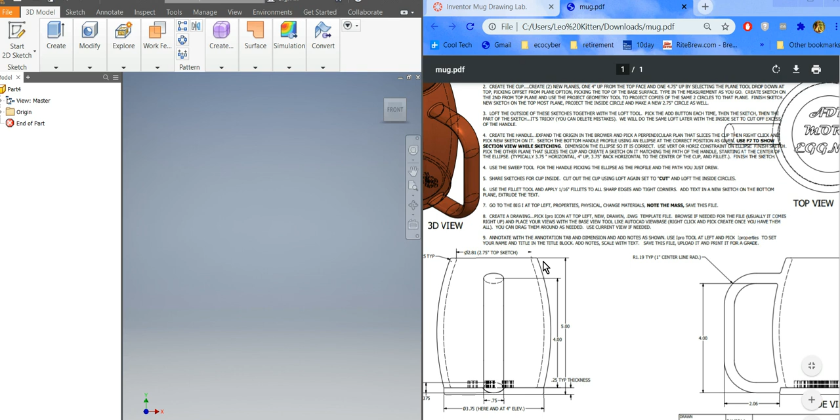Okay, today we're going to make this mug. You can find one on the internet that's similar, or you can just do this one. It's your decision. I'm going to have a split screen going on so we can do both.

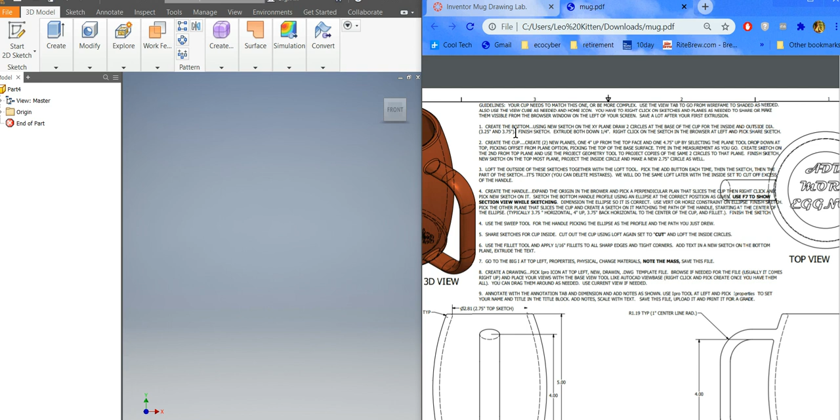The first thing it says here is create the bottom using a new sketch on the XY plane. Draw two circles that form the base, 3 1/4 and 3.75. If you think your mug is about that size, just go with it. This makes the inside and the outside of the mug. Pick yours to be that size, and then we're going to extrude them down 1/4 inch, and then share the sketch.

Right off the bat, we pick Start 2D Sketch, Start 2D Sketch, and then hover over the plane until you see which one you got, and we want the XY plane. Pick it with your left mouse button.

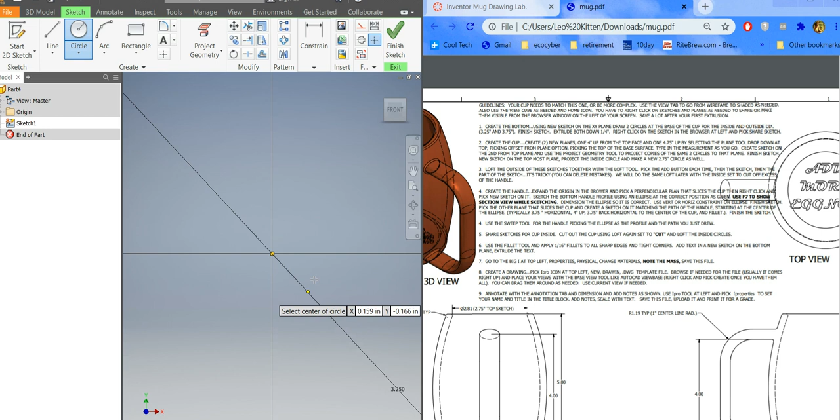Then we're going to pick on Circle, and hover over the origin until we see a green dot. When you see the green dot, then you have your origin selected and it snaps to it. Draw your first circle, 3.25 - just type it in and hit enter. Pick your origin again, move your mouse out so you can see what you're doing, and the next circle was 3.75. Hit enter. Okay, and once that's done, you want to finish sketch.

Let's make sure everybody got that far.

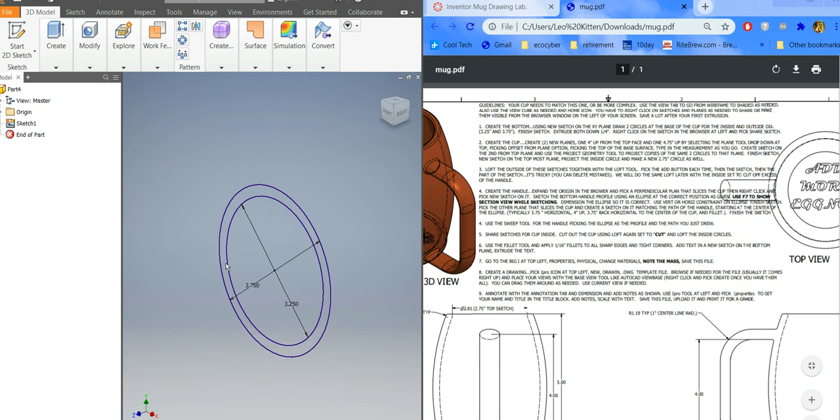Okay, so now we want to make the bottom of it right down here. We're going to extrude these down. Since there's two surfaces here to pick from, you'll have to pick the inside and the outside most likely. They'll both be shaded when you're ready to do it. So go over here and pick extrude, or right click and pick extrude, either way is fine.

And now it's looking for a profile - that's why it's blue. So pick the inside of the center circle, and then pick the outside area between the two circles. That way you got them both.

Now they're going the wrong way. We want them to go down, I think. Extrude both down. To switch directions, you hit this little arrow on there. Everybody see that direction 2? We want to send it down, so we got to switch it to direction 2, so it goes down.

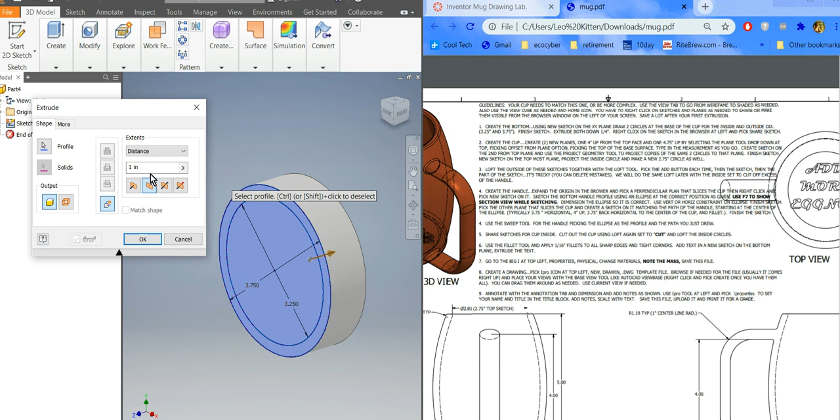We also want to change the thickness from 1 inch over to 0.25. If you want yours to be thinner than that, like if you've got a tin can one, if you want it to be 1/8 of an inch, just make it 0.125. If you want to make it thinner, go ahead. But because this will be the bottom, or if you want it to be real heavy down there, that's fine too. So 0.25 or whatever thickness you want for the bottom. Then just hit OK.

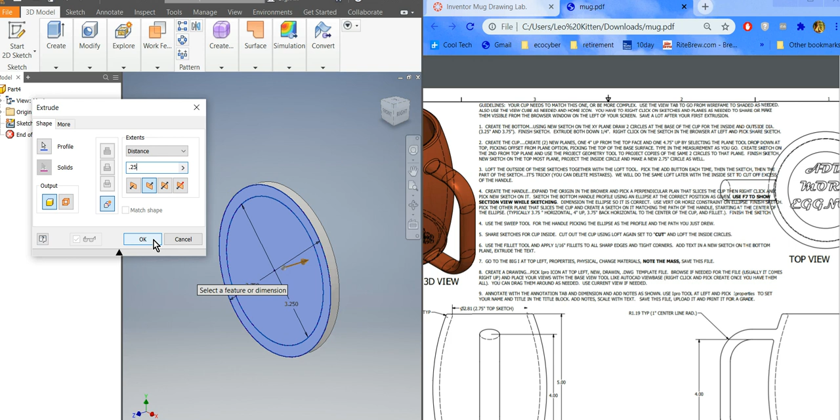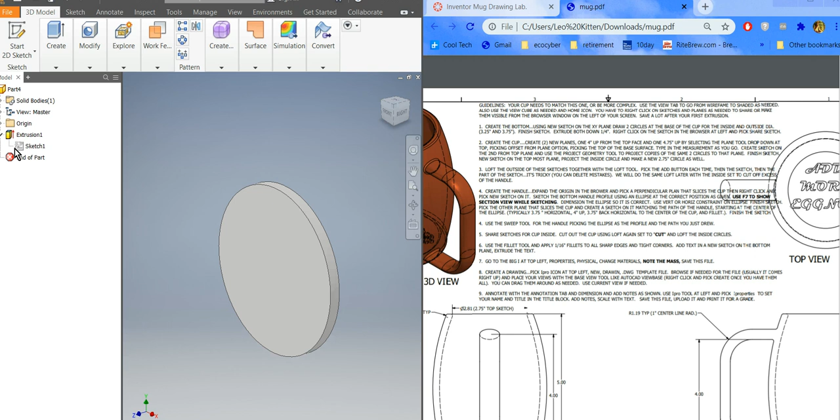Okay, so now we need to extrude this up. Whenever you make an extrusion, it consumes those sketches, so we have to share them so they're not consumed up. Over there in your browser, on the left, hit the little arrow to expand Extrusion 1. Now you can see Sketch 1 again. You want to right click on that and pick Share Sketch, and that'll let you use it multiple times - which some softwares don't make you do, but Inventor does.

Okay, so now we can use this mate, and it also makes it visible. So if share sketch isn't available, you can actually make it visible and get the same benefit out of it.

Alright, so now we need to make a couple planes, I think. We're going to create the cup, so we're going to create 2 new planes - one 4 inches up and one 4.75 up. I did that so I could get a nice blend from here all the way up to the top. If you've got a pretty straight mug, you'll just want to make maybe one plane, however tall you want your mug, maybe 4 inches up. If you've got a pretty big churn, you might want to change that plane to a little lower, like 1/3 of the way up, and then all the way up. So mine, I went from here all the way to 4 inches and 4.75.

After we do that, we're going to draw circles on that. Let me remember what my circles are. Create a sketch on the second plane from the top, and project geometry from the base. Okay, so those will both be the same. These are a little bit on the inside, and that makes it go in more. So this one's 2.75 at the top.

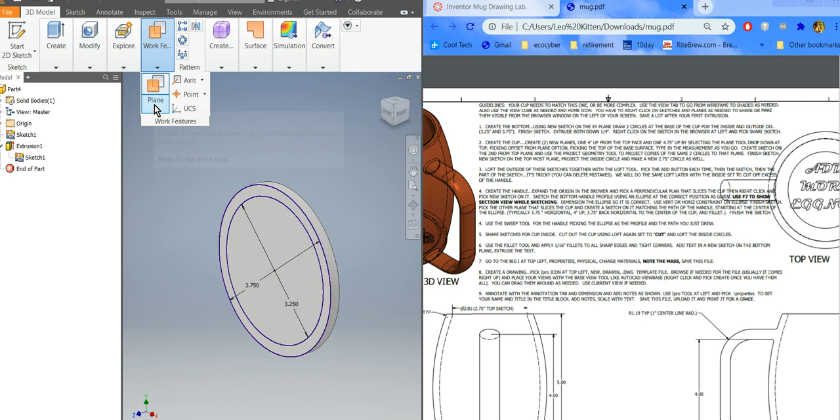Hit the arrow down and pick offset from plane. Now just pick the top of that cylinder we just created. It asks how far up you want to make the plane. We said 4 and 4.75, so pick 4 on the first one and hit the check mark.

You can hit enter to repeat the command in Inventor, just like AutoCAD. So hit enter, and it brings it back up and says select the plane. I do the same thing again, pick that one, and type 4.75. Now we've got both those planes to draw on.

Now it gets a little cumbersome once you get something very complicated, but this one isn't too bad so far.

Now we basically need to, on this one, just project these same two circles up. If you want yours to cave in or cave out, don't just project them — draw two new ones instead. But I'm going to project them.

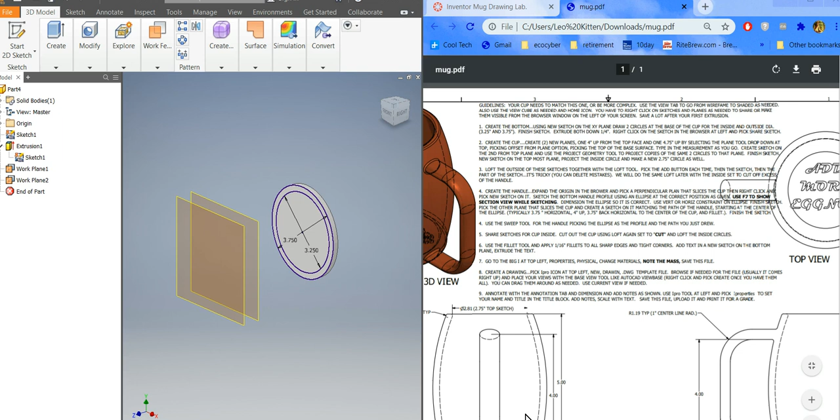So watch me. What we want to do is hover over that bottom plane we created, right click on it, and pick new sketch. Now when I hover over it, I'm hovering over the edge — that's how I select it. Right click on it, new sketch, and it should bring it on up. Now you're drawing flat onto that plane.

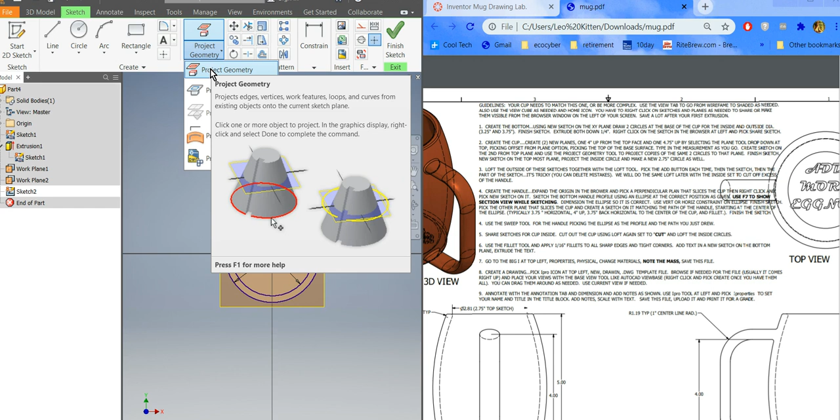Now, instead of redrawing those circles, you always want to use whatever you can from the previous sketch. I'm going to project those circles up with the project geometry button. If you want them to be a different size, so your cup caves in or caves out, just draw new ones at whatever size you want. Either way works. So I'm going to project the first two.

Just like that. Once you draw your new ones, throw a dimension on them, or project them like I did, and finish the sketch.

Same thing on this last plane. Basically, right click over the edge of it, new sketch, and draw — project the inside circle, and then make a smaller one, so that helps it cave in. So I'm going to project geometry, project this inside circle, and then draw a new circle.

Make sure I hover over to get a green dot so it's fully selected, and then I'm going to type in 2.75, enter. Now notice what we're doing when we're making these sketches.

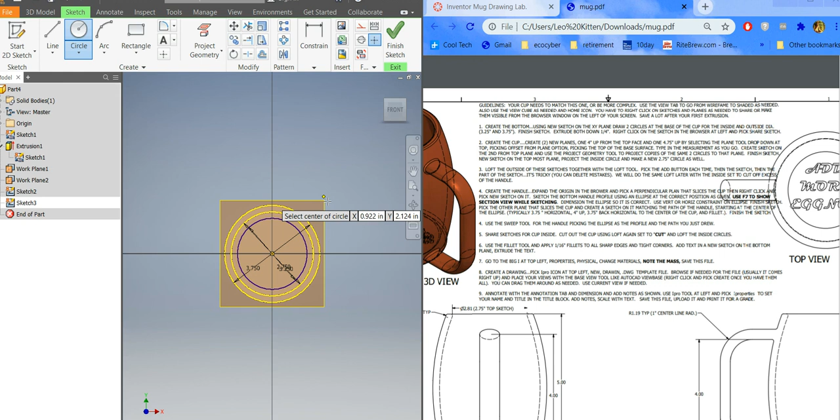Everything's turning purple, and in the bottom right corner of your screen it says fully defined. That's one thing we always want to see — fully defined. If it's not fully defined, then you didn't put enough dimensions or information in to fully constrain this thing. So I'm going to finish that sketch.

Now we're ready to loft the outside of these sketches together with the loft tool. We want to pick the add button each time, then the sketch, and then the part of the sketch that is going to be lofted up. So it gets pretty tricky — we're trying to do the outside and basically the whole thing.

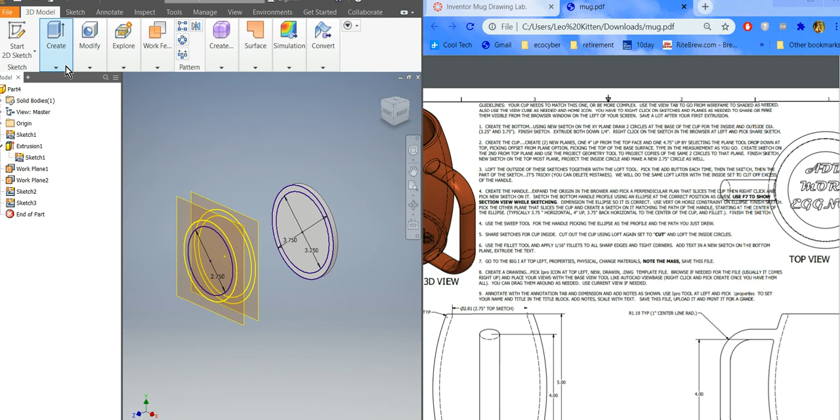We will do the same loft later, but we'll pick the inside part of it. So I'm going to do it real slowly, so if you want to watch me do it — it's a little tricky. So I go over here and I pick loft, alright?

You click here to add, and you basically pick the first sketch like that, trying to get the whole thing. I kind of got lucky there - so there it is, grabbing the whole thing.

So I picked that sketch, and it says on the note, selected sketch has multiple loops, please select the desired loop. I want the whole thing, so I'm going to pick that. If I would have picked the inside of it, I only would have gotten the inside of the loop.

Then I click to add, grab this one, and select on the circle itself. It says the same thing, it has multiple loops, so I don't want just the inside - make sure you don't just pick the inside. We want the outside, so I'm picking the outside one like that.

Then I click to add, and pick the top one. Again it says it has multiple possibilities. You could draw all these as separate sketches, but it's a little easier, less work, to do them at the same time. That's why I did them.

Now I'm picking on the outside again. You can see it starting to form - it should bend around this when you do all three at once. If you don't want it to bend around, you just go straight up from one to the other, hit OK, then share that sketch and do it again, and it would go straight. But I want it to bend, so that's why I picked that.

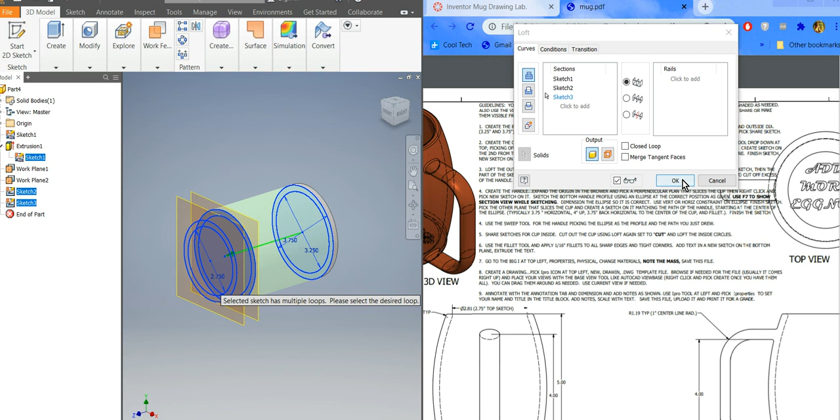When you get all three of them selected like that - I think I have them all selected, it's still asking me for multiple loops. I think I got them. I'm going to hit OK and see what happens here. Yeah, I got them. All right.

So we have to draw this ellipse for it to follow the path of the handle first. Since this thing's round, you just need a perpendicular plane - any one of them will work.

So what we do is go over to the origin in the browser and hit the little arrow to expand it. Expand it out, and now we want to find a plane that splits it, and we'll use the opposite one for the path. So you could pick the YZ, for instance, or you could pick the XZ. Let's do the YZ since that's at the top. Just right-click over that and pick New Sketch - hover over it, right-click, and pick New Sketch.

Now you're drawing on it. On mine, I do it right here at the bottom, and that's about as good a spot. If your handle's a little farther up and you want to put it an inch up, that's fine too - just draw it about an inch up and throw a dimension on it to the origin. Say it was there - I'll draw mine a little bit up just so you can see how that works, instead of right at the origin like that one is.

To draw a circle, you basically just pick circle. To draw an ellipse, you expand the circle down and then pick ellipse. I'm going to draw mine an inch up just so you can see how it works - actually, I'll draw it a quarter inch up. If you want yours farther up, do it farther up. If you want yours down here at the origin, draw it up on the green dot.

So I try to pick - you can see it wants to snap to the x-axis here, or the z-axis in this case, so I'm going to go ahead and let it do that. I'm going to try to hold it vertical, up and down and not crooked. It wouldn't really matter except you'd have a weird looking handle. So I'm going to pick a spot for that.

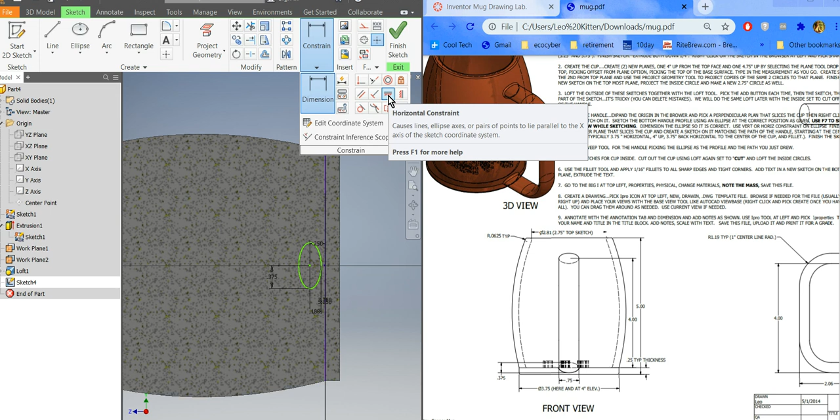The way to do that is you use these constraints, and one of them is horizontal and one is vertical. Just because it looks like it's horizontal, it might be vertical depending on where your axes are. I'm going to try vertical and see if it works. And it's not—I can see already it's got a yellow line going up and down, so that is not vertical. I need to do the horizontal.

Okay, so I'm doing the horizontal. Now you can see it's going the right direction, the yellow is. So I'm going to pick that center of it and my origin, and now it turned purple, so it's good.

Alright, so we've got that done. Finish that sketch—that's the first part of doing the sweep. Now we've got to do a plane on the other one. We picked the YZ last time, so this time we want to right click over XZ, okay?

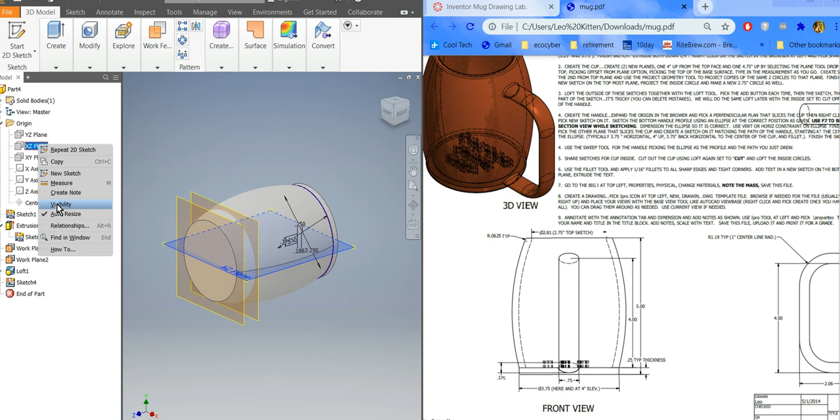And we want to do new sketch. Alright, and let's go ahead and hit F7 right off the bat so we know we can see what we're doing. Now you can see that, you can kind of see where that sketch is before, right in there, right? You can barely see—if you look real close, there's a blue or purple, whatever you want to call it.

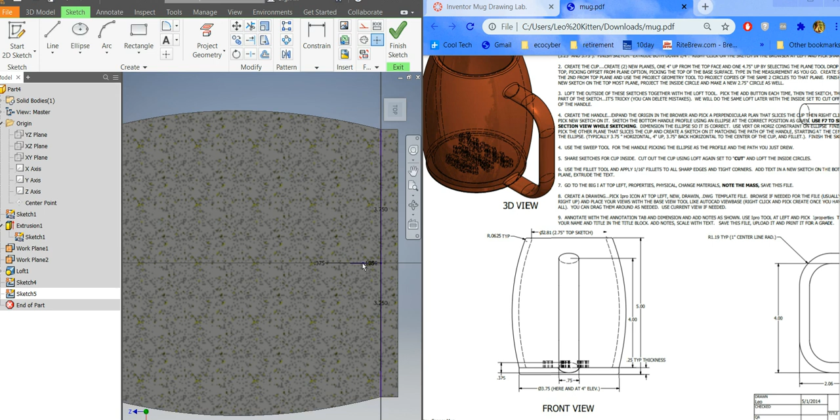We need to have a path that crosses that, okay? So it has to start right there, and then it has to go to wherever you want it to be. Now mine goes, it looks like, roughly 2 1/16, and the mug is 4. So it probably says in the notes how big to make it, and then it's 4 inches tall. But you can kind of freehand yours a little bit and throw some dimensions on it if you're doing a custom one.

So it looks like I've got 3.75 horizontal, 4 up, and then 3.75 back on mine. So I'm just going to do that. Okay, okay.

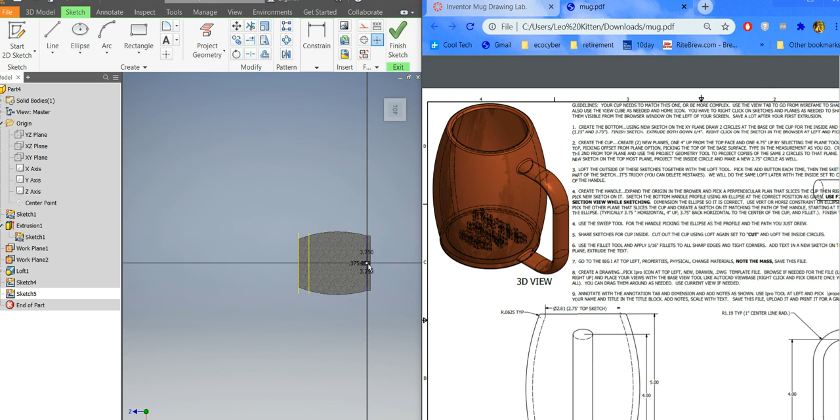So this, if you look real closely, that little blue that's showing up there, that is the side profile of the ellipse. So of course, if you look at an ellipse when it's sideways and flat, it just looks like a line—that's why it looks like a line. But that is the ellipse, just we're on the opposite plane now.

So I want to basically draw a rectangle, 3.75, 4, and 3.75 back, and then I'm going to add probably a 1-inch fillet on it. What did I say on that? Add a fillet, 1-inch center line radius—okay, so yeah, 1-inch fillet on it. But let's draw lines first. So just pick line, nothing fancy, and then we're going to draw from the middle of whatever object you made, a circle or ellipse or whatever.

I got it right there, looks like. Okay, I'm going to make sure I go straight up, hold it straight. You don't want it going crooked. So I'm going straight like that, and I'm going to type in 3.75 on mine. Right, and you can go how far you want.

If your cup's 4-inch diameter, you want it sticking out 2 inches, make it 4. If you want it sticking out 1 inch, make it 3. Okay, so mine's about 4 inches diameter, so I'm going to have to stick up 1.75 inches.

Then I'm going to go basically to the left, make sure I'm going straight to the left. I don't want it to all be crooked like that. And then I'm going to go 4 on that, up. It doesn't have to be that big. It's your cup, so make it whatever you want it to be.

Now whenever you went up, you probably want to go the same amount back down. So I'm going to make sure it's going straight back down, and I'm going to type in 3.75 again. Okay, and it's back down.

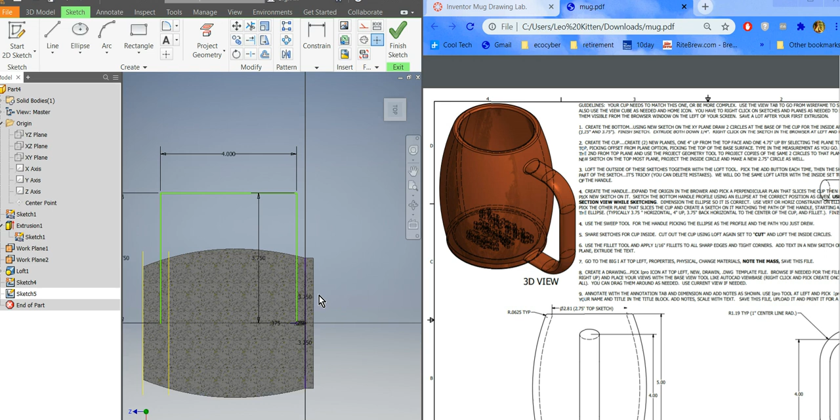Now you can see it's not locked down at all. There's a lot of things missing, it says it's missing 2 dimensions. A nice way to check is to grab a line, see how it's moving around, and hit undo. So it's definitely missing where it started from - even though I picked that point, it did not get it. So I'm going to dimension from that point over to here and see what that does, which should be the same, 0.25 in my case.

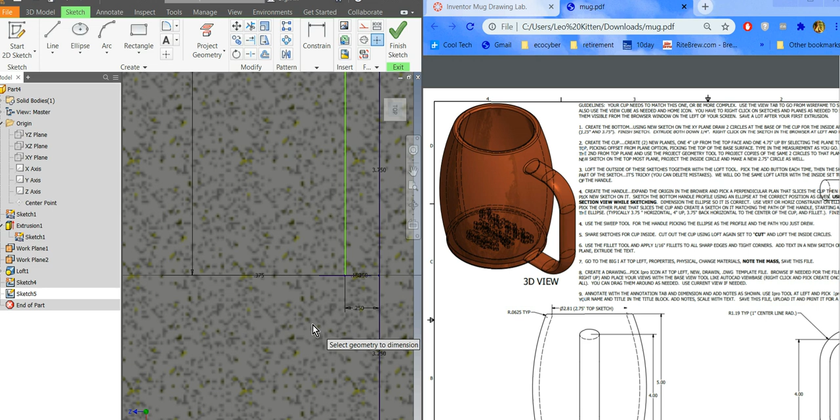Okay, that got that done. And then it probably doesn't know how tall it is too. So once again, I'm going to do the vertical constraint, even though it's horizontal, and pick it right there on the edge of it and to the origin. And that fully locked it down.

So it didn't know where my starting point was, that was its problem. Now after I get that done, I'm going to put a fillet on these 2 and get my radius done.

All right, so fillet is right here, it's all shrunk down. So I think that's fillet - yep, there's fillet. And it defaults to 1/8 of an inch. I'm going to just type in 1 and hit enter. And I'm going to pick the 2 lines I want to fillet together.

It fell off of it. Let's try again here - there we go. And pick the other 2. There we go, and that's all you need for your path.

When you get something like that done, you could do all kinds of crazy things with it. You could put a chamfer on it, you could draw a line at an angle. Whatever you want for your handle to be, the path for that ellipse or circle or rectangle, whatever to follow, that's the path you draw. As long as it's on a perpendicular plane, it'll work.

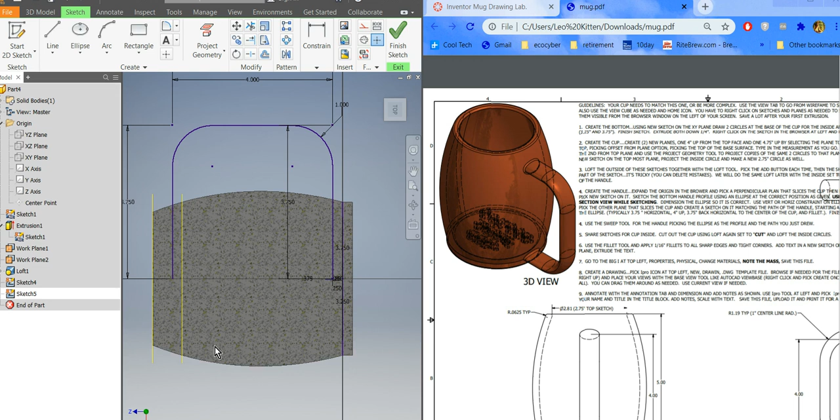All right, when you get that done, hit finish sketch.

Okay, so now we're ready to sweep the profile. So we sweep the profile along this path, and even though you can't see some of it, the best way to see this is you need to change the view, because you can't even see all the stuff on the inside. So you want to go over to view, okay?

And then we want to go to the visual style dropdown and drop that down, and we want to just pick plain old wireframe. If you pick with hidden edges, it won't let you pick it for some reason. So pick just plain old wireframe, and now you can see everything on the inside, okay?

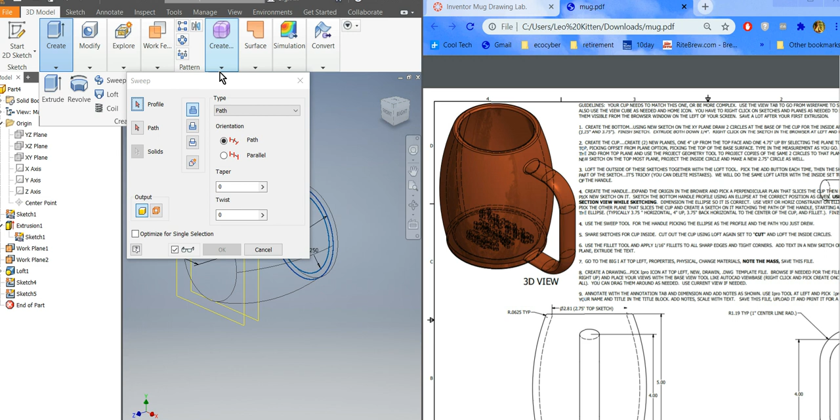And now we can basically, when we go into our sweep, pick our 2 sketches that sweep works off of. Now go back to the 3D model tab and pick sweep. Okay, now it's looking for a path and then a profile - sorry, I said that backwards, it's looking for the profile and then the path.

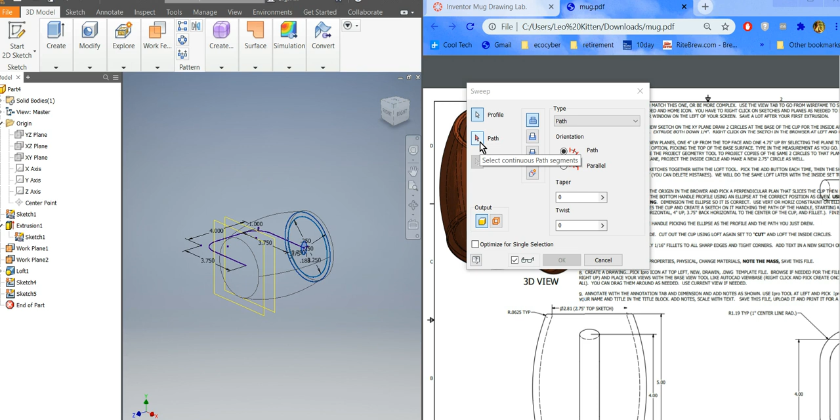So the profile, of course, is that ellipse or circle or whatever you wanted your cross section of your handle to be. So pick that - I don't know when you'd use more than 1 sketch for a profile, but it doesn't automatically move to path. So pick path, and then you got to pick. As long as this is a continuous line and everything's connected, it'll go all the way through, and you can kind of see it happen there. Okay, so I picked that one.

Of course, all these things let you cut it and so forth. You can taper it and do some pretty wild stuff. We're not going to do any of that, so just pick OK.

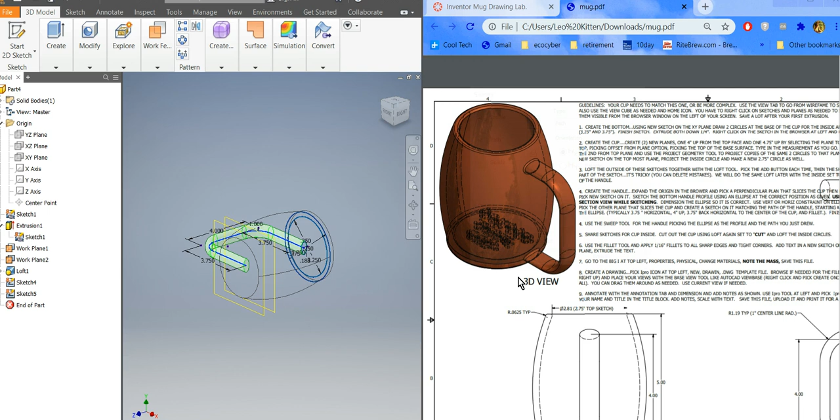Now at this point, I think we need to hollow this out. There's a couple ways to do it. We could loft the two circles down, or we could just shell it out. Either way would probably work since it's a pretty simple design. But if you shell it out, remember it's going to also try to shell out the handle.

I wanted mine a quarter inch thick, so nice and thick. Mine would probably fail because this thing's only 3/8 thick, so it can't actually put a quarter inch wall all the way around it. That's why I lofted down, but we'll go ahead and try it.

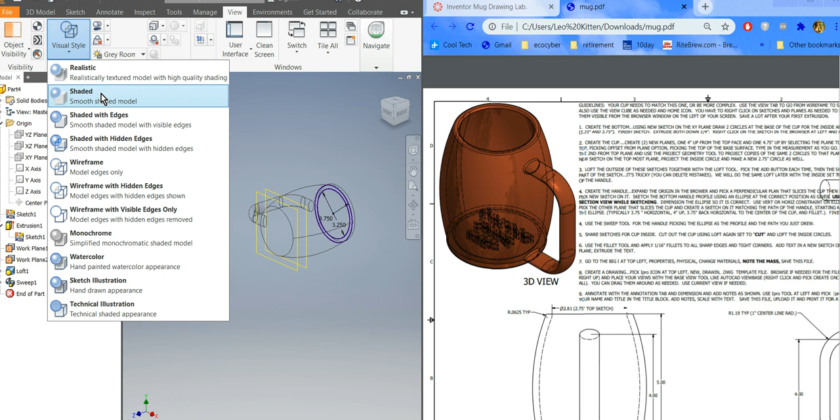So let's go to see if we can shell it. Let's go over to View again, Visual Style, and pick Shaded with Edges. And then let's go back to the 3D model. Now if you want any lip or anything else fancy on top of your mug, now would be the time to do it before we shell it.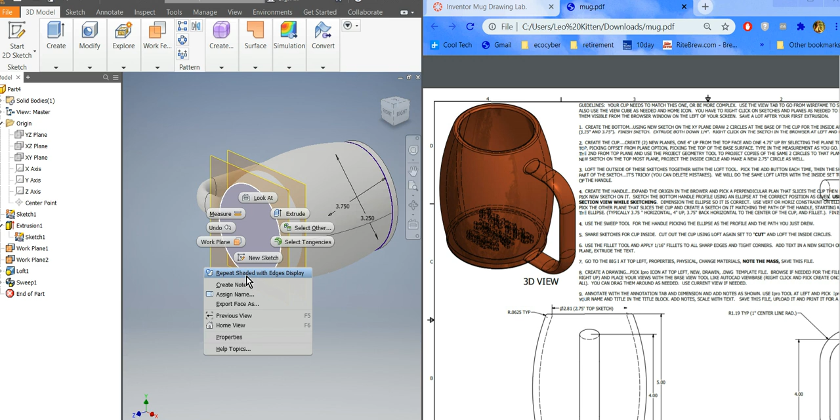You'd want to pick on there, right click, New Sketch, and draw your lip, maybe extrude it down 1/8 of an inch if you have some fancy lip on it. I don't have any of that, so I'm not going to do that.

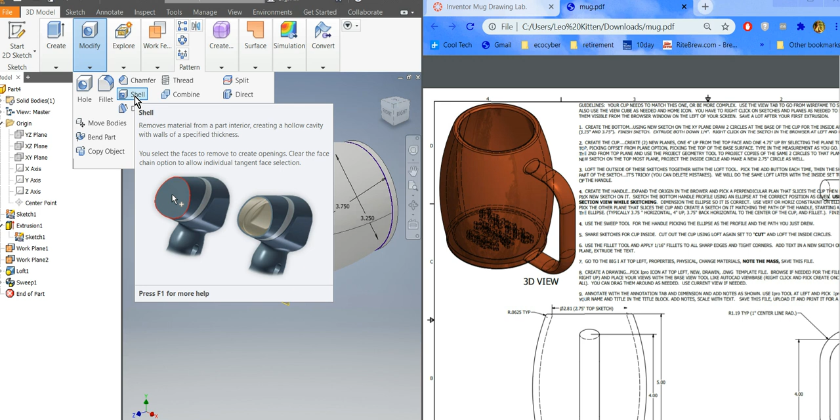So I'm going to go to Shell, which is buried over here somewhere under Modify. There it is, Shell. The way Shell works is you pick Shell, and then it's looking for a face you want to be gone. You don't have to pick a face, but very rarely do you make something completely hollow, so you usually remove a face or two.

So I'm going to pick Shell and change the thickness from 0.1 because I want mine thick—0.25. Then I'm going to hover over the face here, and it's failing already. I'm sure it's because of that handle, since they can't figure out how to put a quarter inch shell in a handle that's not even big enough for that.

Now, since the handle is 3/8, I'll bet I can get away with 0.18. Nope, it's not even letting me do that. So I can't get shell to work on mine unless I go thinner than what I like. If I go 0.125, it probably works.

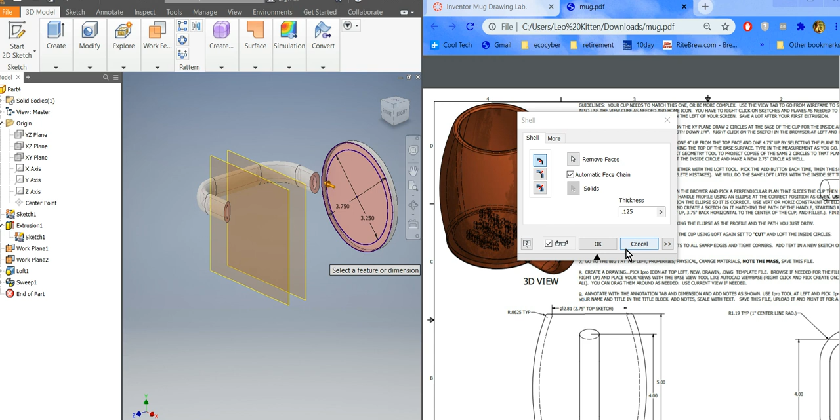I probably should save before you shell, because a lot of times it'll break the system. So if you didn't get it to work like I did, this is a good time to save. Let's go ahead and save our work. Mine was ultimately a failure there. Just make sure you put it on your U drive under CAD 60. I'm going to save this on my laptop real quick here.

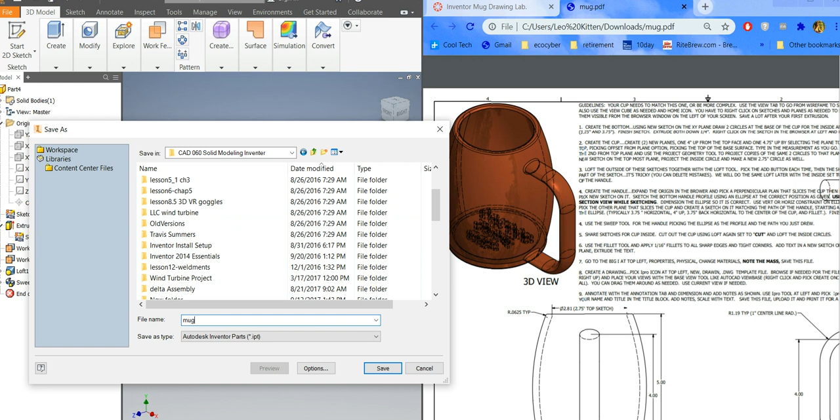Okay, so originally what we said was we were going to basically loft the inside of it out. So now we're going to have to loft the inside of it out, basically remove it.

I created a sketch up here on top, and then I had two circles here and two circles there, and I did that on purpose because they're all a quarter inch smaller diameter to get rid of them. If you forgot to put one on top, it isn't any big deal—you just right click on top of that face, New Sketch, and draw your circle however small you want it.

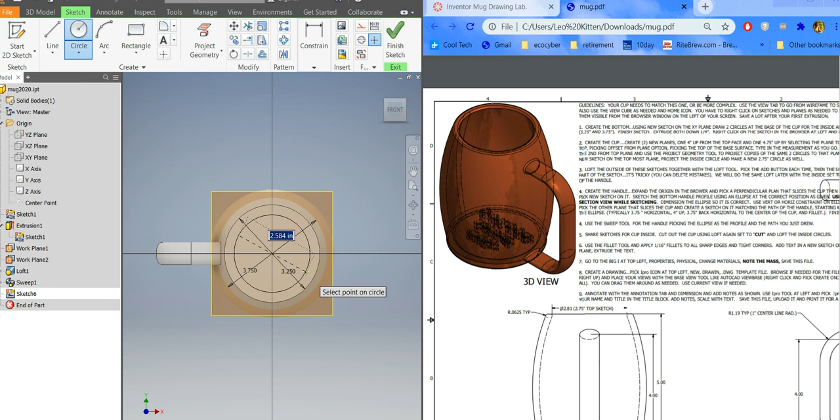Even though I did it already, I'll just do it again for fun here. I'm going to draw a circle on the top of that. I right clicked over the top face and picked New Sketch, then drew a circle 2.75, which I did already, but now I've got another one in there. Finish sketch. Alright, so now I've got a circle here, one on the inside which I can't see, and one on the bottom.

That second sketch was consumed when we did our first loft, so I need to be able to see that again—I need to share it. I'm going to go over to the left in my browser and expand it again. I'm not going to use the third sketch because I just made one again, but you might need to if you have two sketches there.

So I'm going to right click on that and share it. If share is not available, you can always turn the visibility on—it does the same thing. Share sketch. Now I can't really see it very good, so again I'm going to go back to View, Visual Style, and go to Wireframe. Now I'm going to loft the inside only and cut it.

Okay, so I have 3 sketches. The inside circles are the ones I'm trying to basically loft down and cut out of there. All right, so I'm basically going to once again go to loft here.

It doesn't really matter what order we go into. Right away I've got to switch it to cut, because we don't want to basically build something new, we want to cut something out. So I pick that, then I pick click to add.

I hover over the first sketch, or the top one, and pick on it. There's only one available on mine. If there's two, you'd have to pick on the inside of it, as you'll see on the next one. So I click to add, and pick on these lines again till they show up, hovering over the inside only and picking it. So it's not getting the outside.

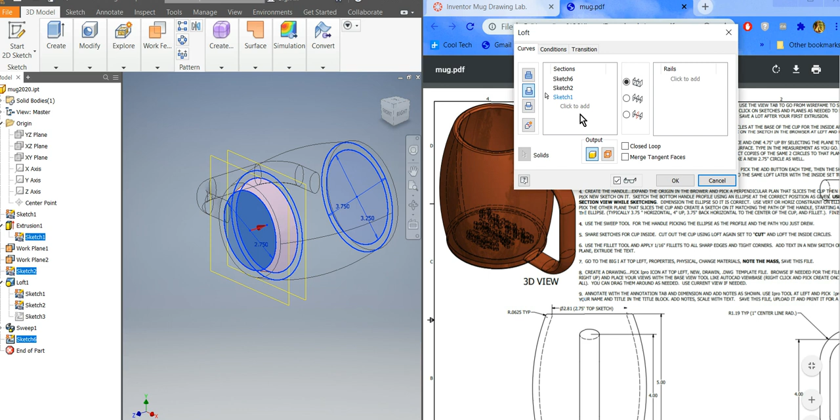Now I pick on the inside. It doesn't actually happen until I pick something else, but I don't want to pick anything else, so I might break it. So now I'm going to hit OK, and it should cut all that out. I can't really tell, but you can kind of see it in here, these lines. So go over to view again in 3D model, shaded with edges, and you'll be able to see it real nice.

Okay, so some of the last things we want to do on this is put some nice fillets around so we don't cut our lip on it and so forth. So maybe like a 16th fillet on the top and a 16th on the bottom. You still want to give it, I always like it when it looks a little bit sharp, but you don't want to overdo it. It'll pour better too if it's not too big of a fillet in there.

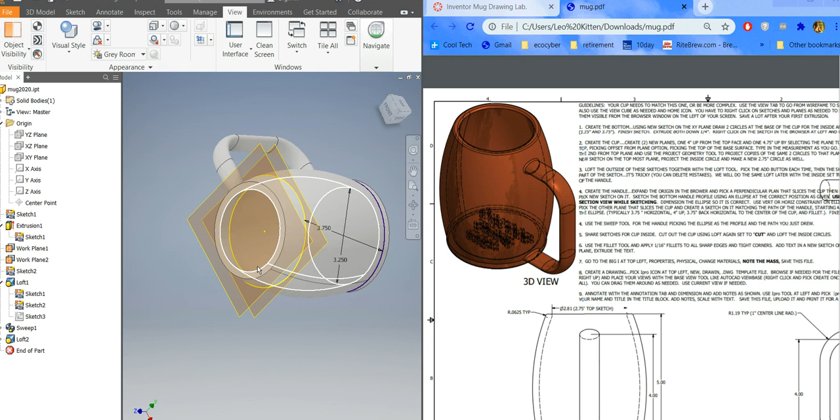So it looks like I put a 16th fillet in several places here, inside and outside. I don't think I put one on the inside, just right here and right there at the top. So go back over to 3D model and add your fillets.

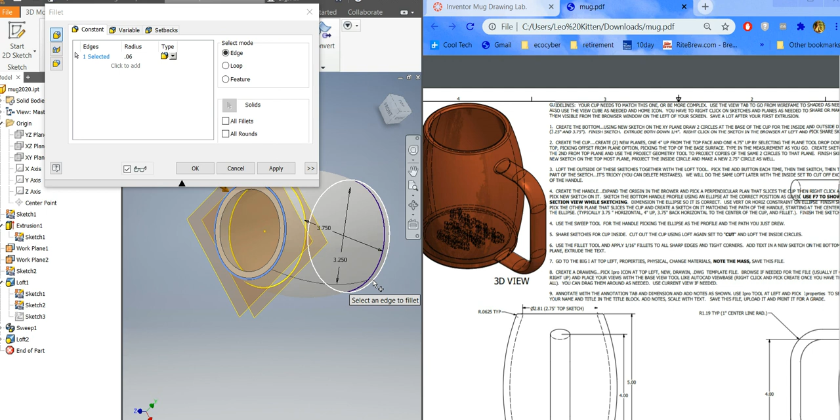Change it to a 16th, 0.06. I'm going to go on the outside of it, leaving the inside tight, and then at the bottom and top hit apply just to smooth it out a little bit, and cancel out of that when I get it done. So I've got my two fillets on it.

I think the last thing I wanted you to do is put some words on it. We'll go through that here in one second.

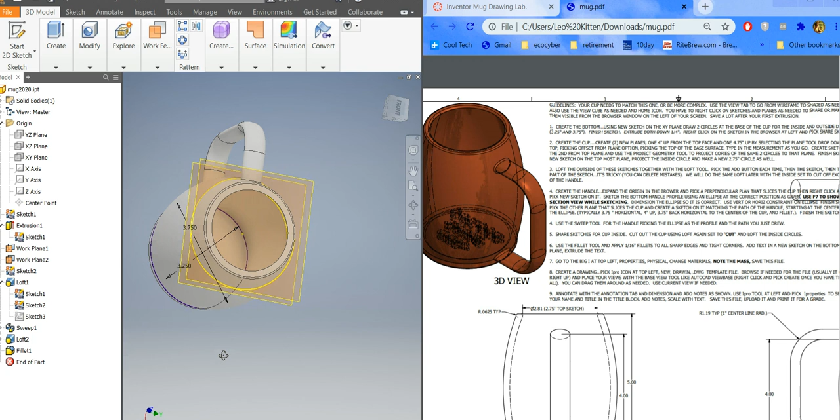Okay, we're going to add some text to the inside of this. Now, as you notice, things are getting a little bit cluttered with planes and everything else and sketches showing up here. If you ever want to hide any of them, all you've got to do is hover over them in the browser and turn visibility off. That's how you hide any of that stuff. Now you've got to remember, you can always unhide it too if you need it, like if you want to make another sketch on that plane. And these will not show up in your drawing to the customer, so you don't have to really worry about that.

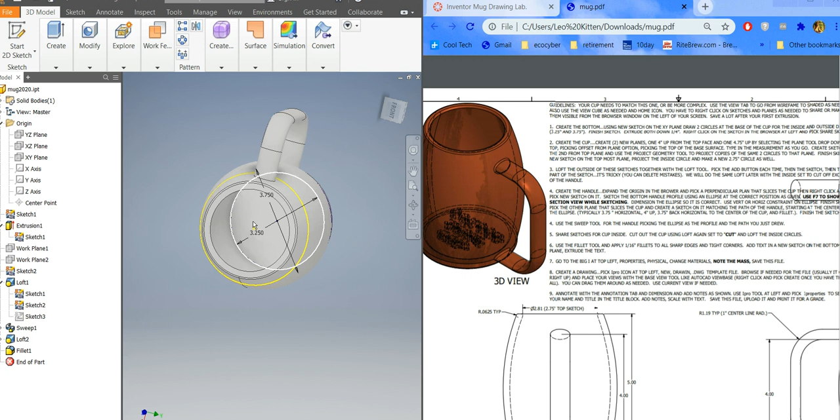Alright, so you want to be able to see the bottom, so hover over the bottom face of it, the bottom inside face I should say. Right click, new sketch, so we're basically drawing on that bottom face now. So now we're just going to put some text on there and then extrude it up.

Now real fancy fonts and things like that don't work the best. There's a font selection right there, just like it would be in AutoCAD. You just pick text, and it wants to know the location. You can always move it.

So I always just pick a starting point, like right there. It's close enough. You can do two corners if you want to drag it, but if you just pick one point and don't drag your mouse, then it'll start right there. And like I said, it's easy to move.

Think about how tall you want it to be, depending on how many words you want to put in there, right? So I'm going to make mine.

Before you start, you usually want to change the size. If you need to change size after the fact, you have to highlight your text to get it to change. Alright, so maybe 0.25. That's really not very big, 0.5. Okay, I'll put it on 2 lines.

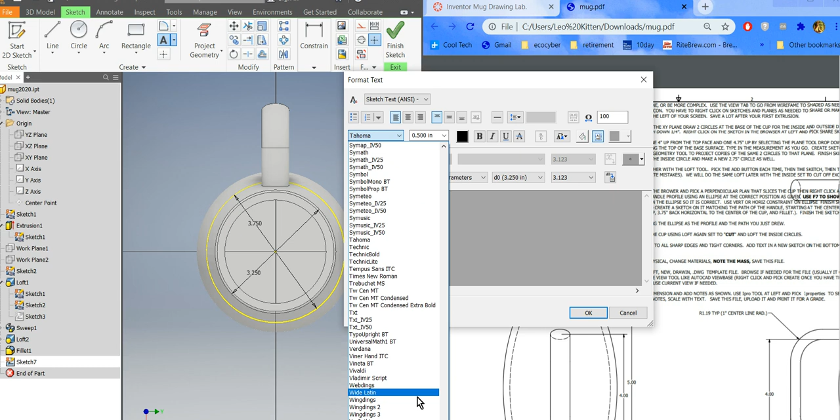Tahoma is a real lame font, but the fancier fonts actually won't extrude. So some of the coolest fonts in here are Papyrus, and I think there might be a Walt Disney one, but half the time they won't work because they're just too complex for it to generate. I know Times New Roman works. Sometimes I get Papyrus to work, but not very often. I thought there was a Disney one in here. Maybe there's not.

I don't know, I always see students sometimes find better ones than I know about anyway. So if you know of a cool font, you can try it once. If it doesn't work, change it back to something simple like Times New Roman.

I'm going to go to Times just because I know it's going to work, and it's best to fix that first. But like I said, you can always highlight your text and then change it, and it'll change. So, caps on, make it italic maybe, fill me up.

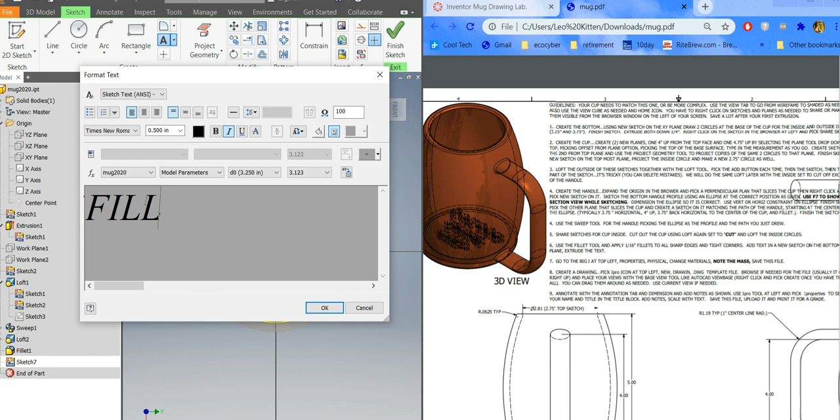Alright, I'm going to put it on 2 lines so it fits a little bit better, and I'm going to highlight it. This is just like Word, and I'm going to center it up like that. Okay, I'm going to hit OK. So this is the same thing you'd see in any word processor.

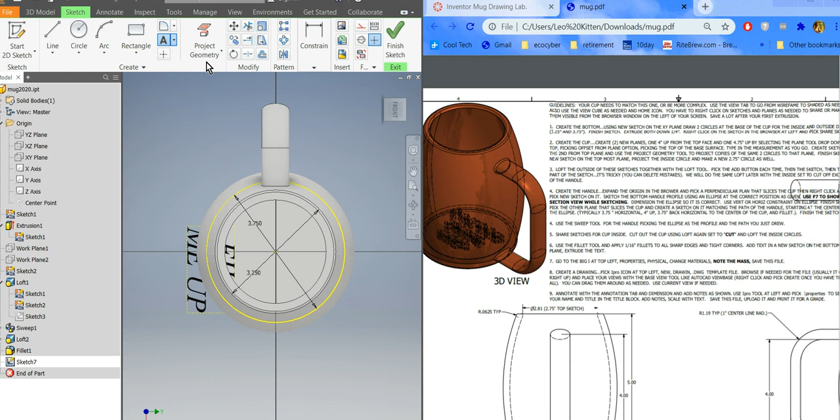And of course it doesn't really matter if it's rotated a little bit. That would actually be correct if I was looking at it while I was drinking it, so I'm fine with that. You can rotate the text. There's a rotate option if you do want to rotate it.

All right, I'm just going to move it. So I'm just going to grab this corner and drag it where I want it. Okay, I picked a pretty good size there, got pretty lucky. If you're not happy with it, you just double click on it, highlight it, change size, change font, wherever you want it to be.

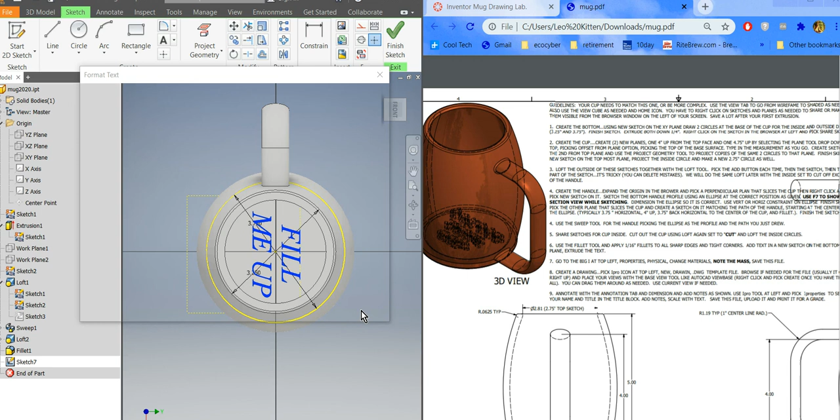Okay, when you get that done, finish sketch and extrude it. Extrude it up however high you want. I don't know, not real tall. Remember, it's probably 3D printed, so if you go too high it won't work out since it's thin letters and so forth. But you want to be able to see it, so 0.25 is definitely plenty tall, so I'm going to hit OK.

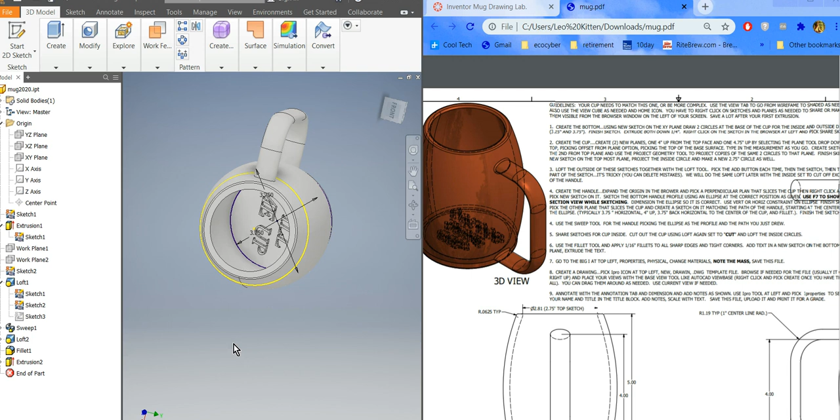And I think that is the end of the mug. If you want to add any other features to it, feel free. But that is it. To do the drawing, of course you should all know how to do drawings now, but we'll go through that here in a second.

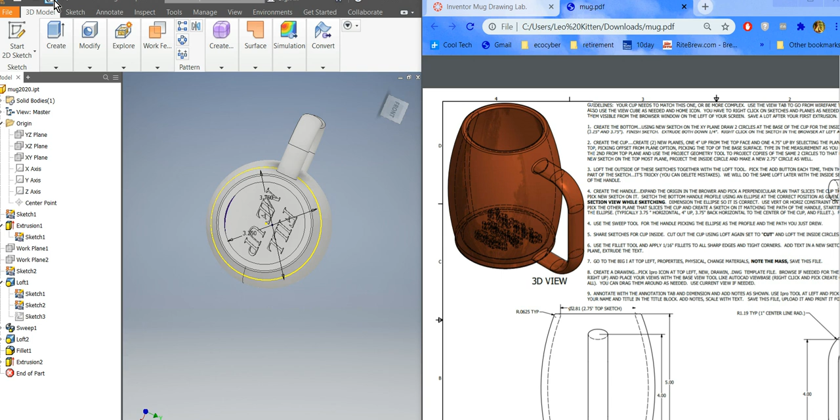Okay, so let's go ahead and make the drawing for this part now. All right, so make sure you save it first. If you haven't saved it yet, make sure you save it on your U drive or somewhere safe. Alright, so a lot of times you'll have a template, like we created in CAD 1 and CAD 2, to put it on. We don't have one created, so we're going to use a default one, okay?

So go to File, and I'll use the one I like, even though it's kind of a pain, but I'll show you how to fix it so it works. And if you haven't done the quadcopter yet, this is very similar to that, so maybe I should put this before the quadcopter project.

All right, so we're going to go to New, or hover over that, and I think just pick New, okay, because that gives us more options. And then all these borders are really lame. They've got great big old title blocks, and I just don't like them. But if you go over to, is it English? I think it's metric. Yeah, you got to go over to the metric one, okay.

So if you go to metric, for some reason there are a lot more of them, and there's one that actually looks pretty professional. We've got to scroll down to drawings first. Look at all those drawings we have to pick from. There's BSI, so that's going to be in metric, so we'll have to fix a couple things on it, but that's okay. I think we can get it to work.

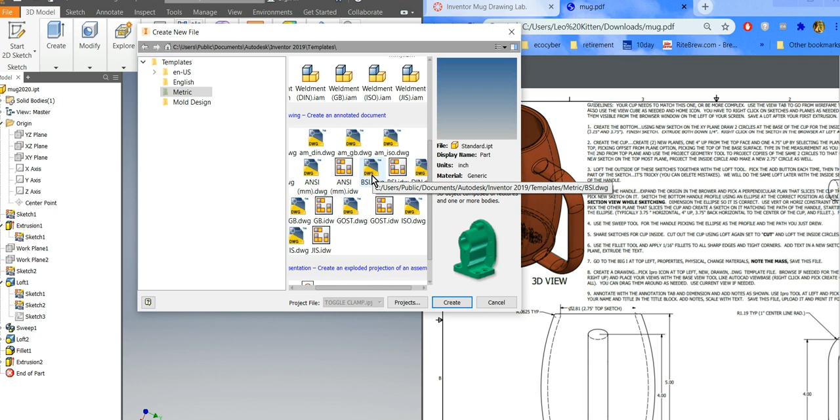So, BSI.DWG, pick that one. That's a more professional looking one, I always think anyway. Create, pick the create button. It'll open up here in a second.

And let's change the size of it right off the bat. So to do that, you hover over the sheet, right click, and hit edit sheet. Then where it says size A3, I'm going to make it a B size. There's just B right there, okay? Now I'm going to hit OK. Alright, and that's more of a standard United States size, okay?

And then it's probably going to be in metric since we picked a metric sheet, so we need to fix that too. So let's go to the Tools tab, and Document Settings. It says the annotations, which are dimensions and text and everything, default standard British Standard BSI. What does that stand for?

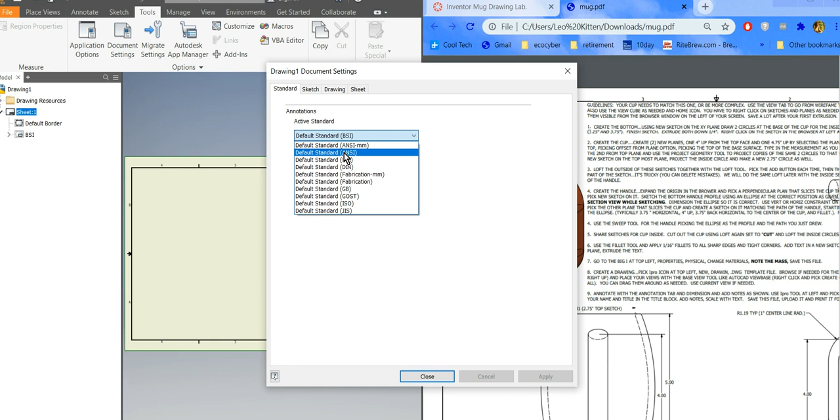I don't know, it's some British standard system. I want ANSI, American National Standards Institute - British Standard Institute, that's what it was. So I want ANSI, and I don't want millimeter. Default standard ANSI, pick that, and then hit OK. So now all our dimensions will look like American style dimensions, like these.

Alright, so now we're ready to bring the mug in. Of course, you don't have to type all this text, but you need to have all these views. The way Inventor works is you drop in the main view, and then you just move your mouse and pick a spot for the two projected ones. So this would be the main one, and then the 3D one would be over here. Okay, so I want that one.

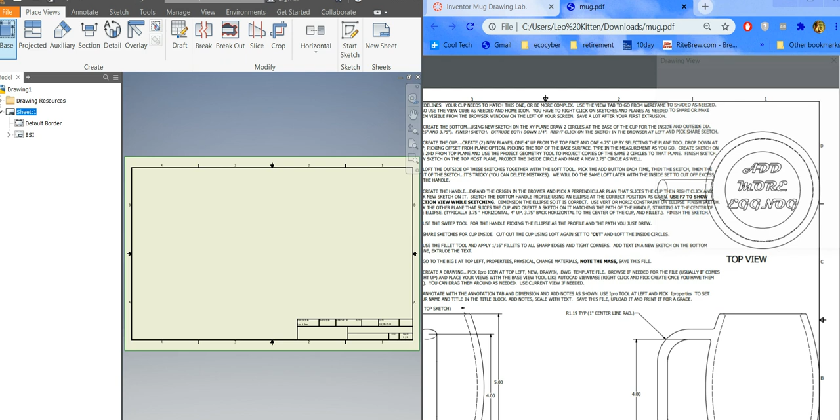So I'm going to go up to Place Views, Base, and since I have the mug open, it should automatically bring it up. It does. It gives me a top view, which I don't want, but I've got a view cube, so look at your view cube and pick a side until you get the right one you want. I'm gonna pick that one, which is the bottom, but that's still the one I want, regardless of what it says. And then it says 1:2 scale.

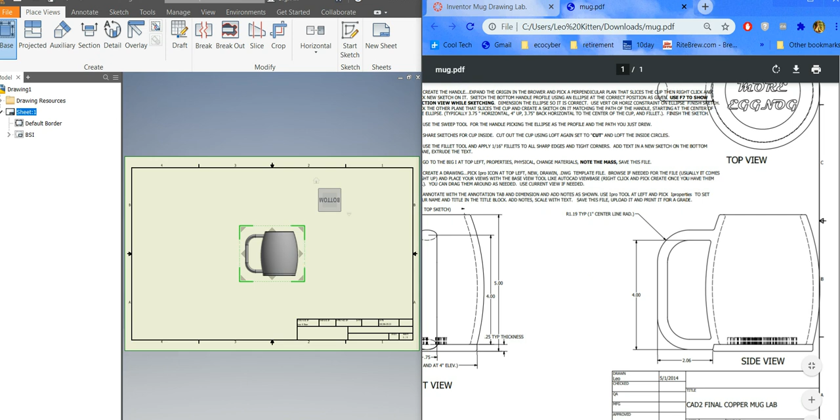That's probably fine. What size did I make it here? I made it on a C size drawing actually. Probably did 1:1 scale, but 1:2 is fine. So I'm gonna put it over here, or you can try to get 1:1 to work if you want to see it full size. I don't know if it'll fit. It ain't gonna fit, so I'm gonna do 1:2. If you want to switch it to C size so it fits and do 1:1, that's fine too, whatever you want to do.

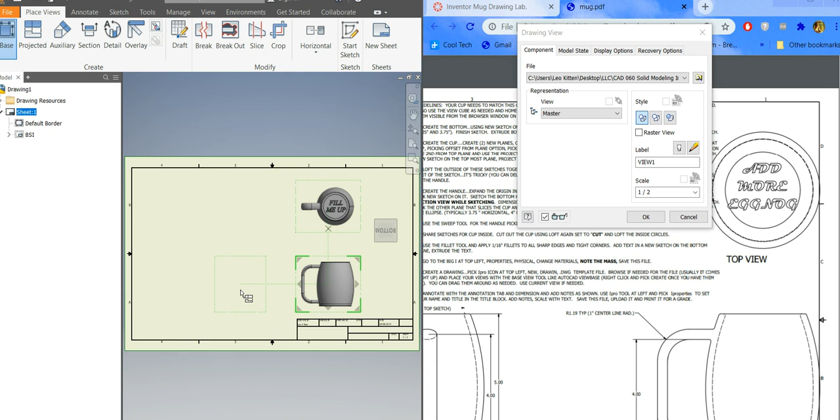I'm gonna do it like this. So whenever you see that four-headed arrow by your mouse, that means you're moving something, not just in CAD. I'm gonna move that to a good spot like that. And now I'm going to just move my mouse straight up and pick a spot for my top view. Then I'll move my mouse straight to the left and pick a spot for my left view. Then I'll go diagonally and pick a spot for my 3D view. When I'm all done, I just right click and hit create or OK.

Now they all look pretty good. They're all set up to the default hidden line shown, which is standard for a part, but the 3D one we usually change to more of a pure 3D. So double click on the 3D object. Just so you know, usually if you want to change these two, change the parent, which is the first one we put in. So I double clicked on that view, and then I'm gonna go down here and change the style.

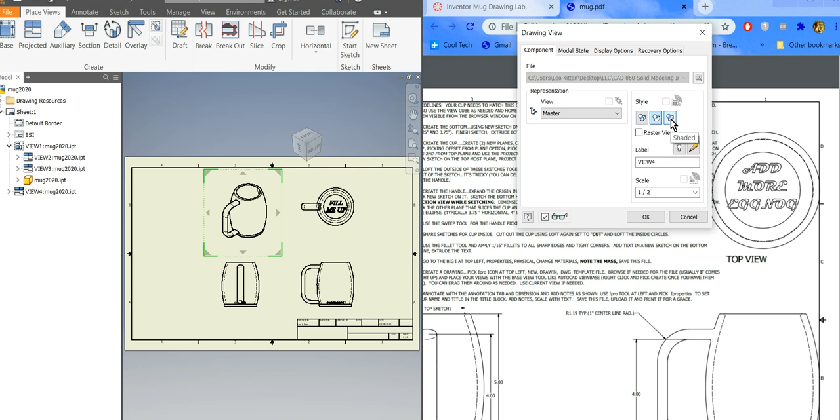Where it says style there, change that to shaded. Hit OK. Alright, so I get more of a true 3D view.

Now we need to add all these dimensions. The dimensions are pretty easy, a lot easier than AutoCAD. You're basically picking faces to dimension off of, or points in a few cases, but most of the time faces.

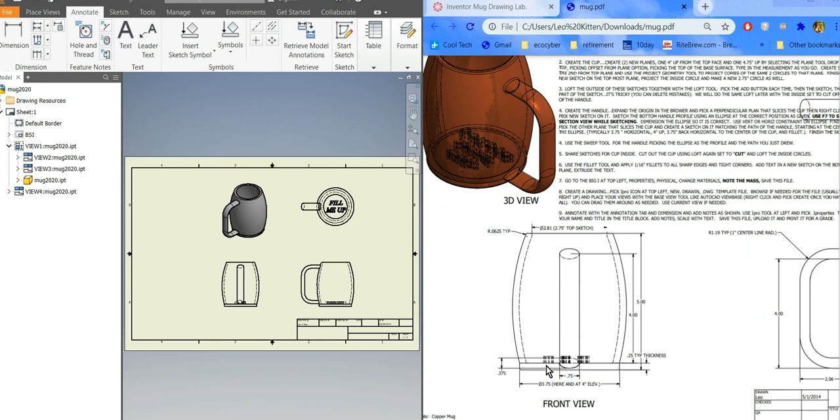So you go over to Annotate, and anything that's a cylinder, you really should have a center line in it. You pick two sides to make the center line.

Anything that's a circle, like theoretically this, if it wasn't a mug, you'd put a center mark in it. Debatable whether you want it for a mug. And if you want a center line, you pick the two sides you want to put it on, like that.

Now I didn't do it on this one because for a mug, I don't know if you really need it. I guess for a design, to send it to the factory, you still would probably need it, so it'd be a good idea. To put the front view, side view, and top view, that's just done with text.

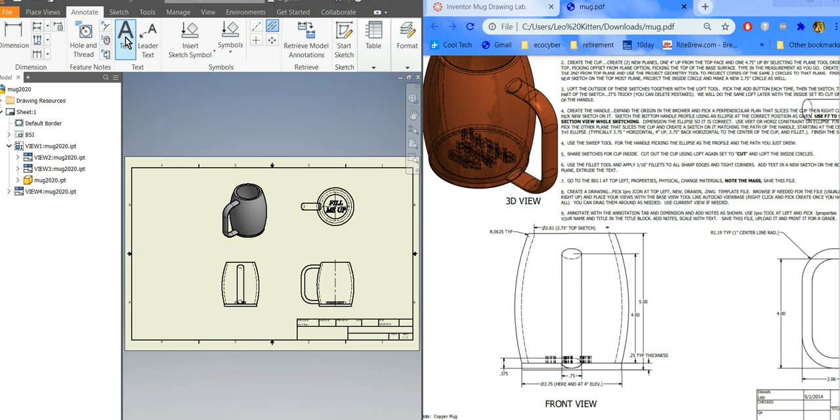To throw dimensions on it, it's just done with dimension. So for instance, this 3.75, let's grab that.

See, it's dimensioning to the fillets because I picked on that face. So I'm going to escape and try again.

I'm going to pick on this point on this line. Now I'm going to avoid the points when I can. You could pick that center point, but it can get you in trouble. So you want to try to get in the habit of avoiding it, because a lot of times you don't want to dimension to the point.

Okay, there I've got 3.75. So you do that to all of them.

Now to put text in, of course these arrows mean that's what you're going to get, right? That's the standard dimension. To put information in it, here at 4-inch elevation. That was more to help you build it, but that's how you add text.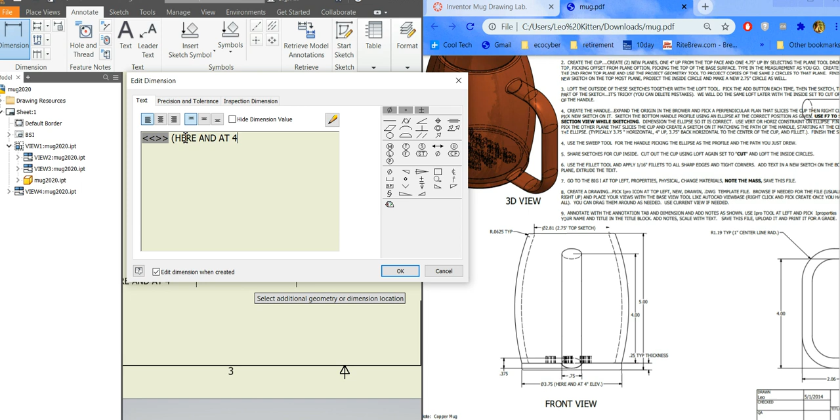Okay, so anytime you've got to add text, you just add it right there, and you can always double click on it to add it later. And then you can just do it like that, and you can always drag it around.

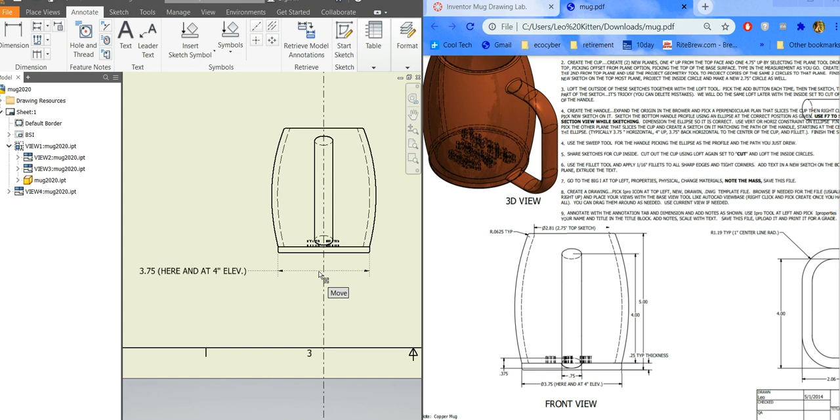Try to get it to fit in. You got to hit escape to get out of edit mode a few times, and then drag it where you want to put it. And of course, it ain't going to fit inside there because it's an eighth of an inch tall based on the drawing size.

So since I use B size, now it doesn't fit in there. If I use C size, it would have. So just for the fun of it, see how easy it is to switch. Edit sheet. C. Okay, now it's C size.

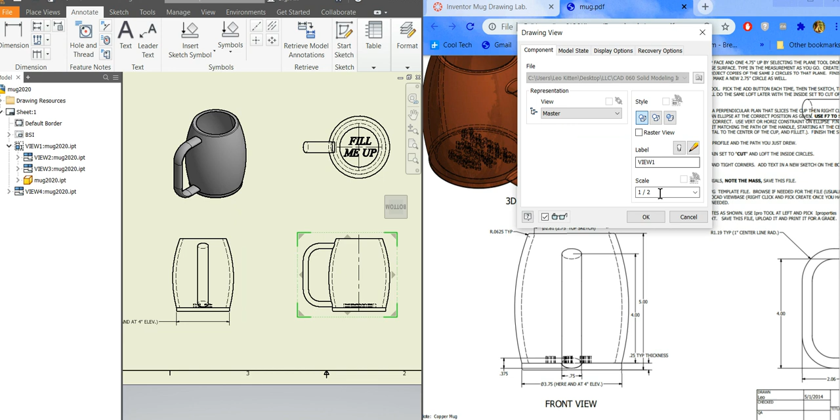Double click on this one. 1:2, that changes all three of those. Double click on that - oops, got the wrong one. Click on that one. I must have got the wrong one again.

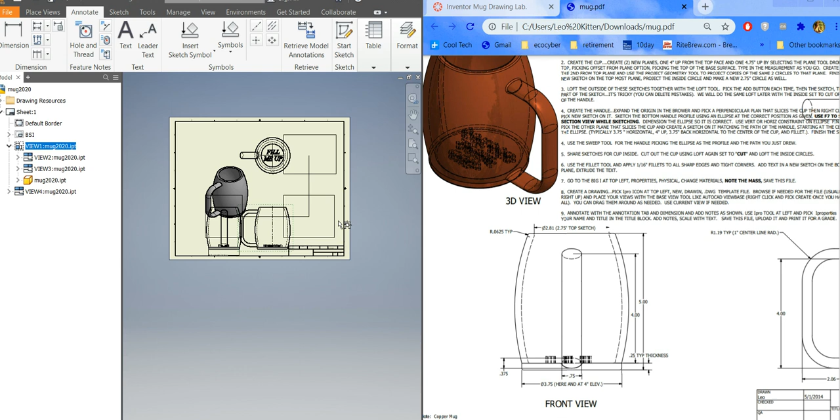So that's how easy it is to change it. You can always move these views around. Now C size, just for your information, notice how they follow each other like they're supposed to - it's twice as big as A size, so it prints out pretty nice on A size sheets. Even though the text will be a little smaller, it'll still look nice.

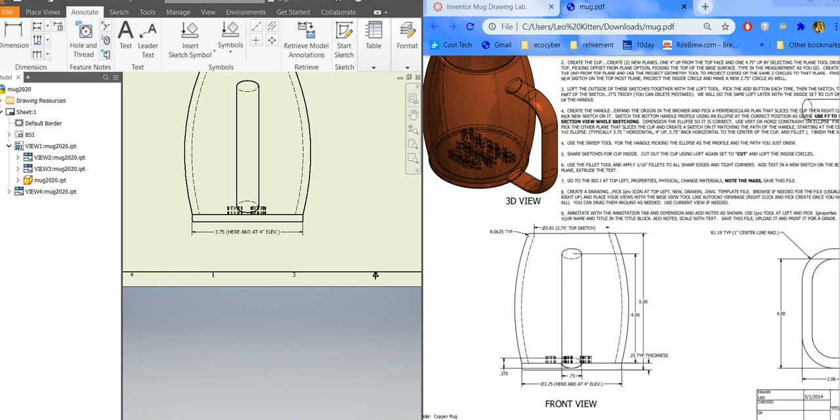Okay, so go ahead and dimension it all the way up, don't forget to put your text in there, and to calculate the weight. Pay attention for a minute here - one last thing before I forget. You've got to put in here how much it weighs, and you've got to change the material.

So to do that, you have to be in the part - you can't do it in the drawing. To change material, it's pretty easy. Just go over here where it says generic, drop that down, and change it to whatever material you want. I'll change mine to gold today.

And then I want to know how much it weighs. To find the weight, you go to File, iProperties, physical tab, and then pick Update, and it tells me the mass. So this one, in gold, would weigh 12.84 pounds.

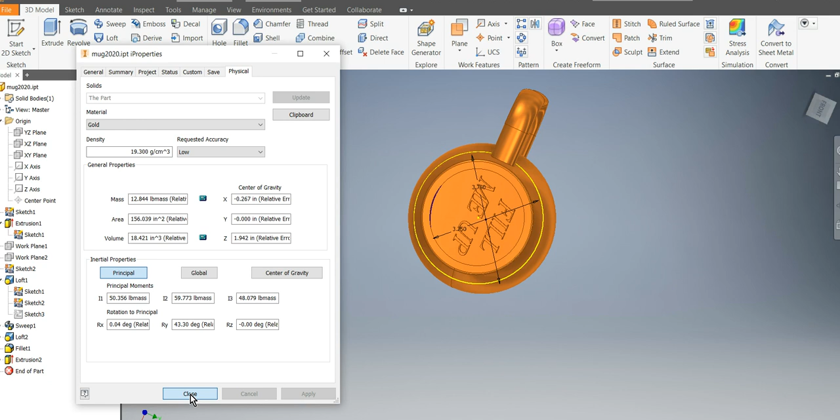Okay, so you've got to put that in your notes. Make sure you add that to however much yours weighs in the notes there. That's the end of the video. I think that's everything - if I missed anything, you still got to do it, whatever the instructions say.